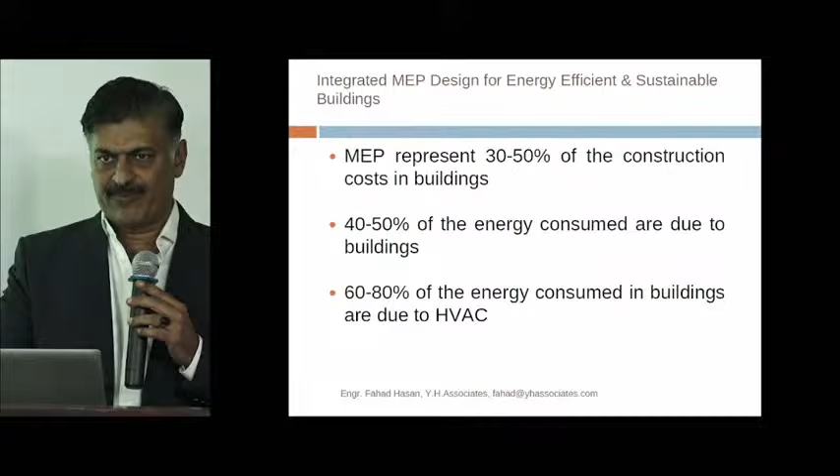If we look at residential buildings, the power loads are not much because cooking and hot water are by gas in Pakistan most of the time. But your air conditioner is basically the main eater of your electrical consumption. But if you are talking about an office, the power requirement for office appliances is definitely high. So we can say there the HVAC contribution is around 60%.

I went through a survey, and they said in Pakistan approximately 43.7% of the energy is being consumed by buildings. So on average, we can say 40% of the energy is consumed by buildings. An energy efficient and sustainable building is designed to minimize the environmental impact and energy consumption throughout its entire life cycle, from construction to daily operations.

When we talk about energy efficiency, its features include using less energy, employing methods to reduce energy consumption for tasks like heating, cooling, and lighting, which are mandatory for buildings. Otherwise, it will become like a dark cave. High performance designs incorporate advanced insulation, high performance windows, and optimal building orientation to minimize energy needs.

Energy efficiency utilizes energy efficient HVAC equipment, lights, and appliances to use less electricity for the same function without compromising usage. Renewable energy often integrates on-site renewable sources like solar power to lower dependency on fossil fuels. And the sustainable features include eco-friendly materials, prioritizing recycled, renewable, and sustainably sourced materials to reduce waste and demand for new resources.

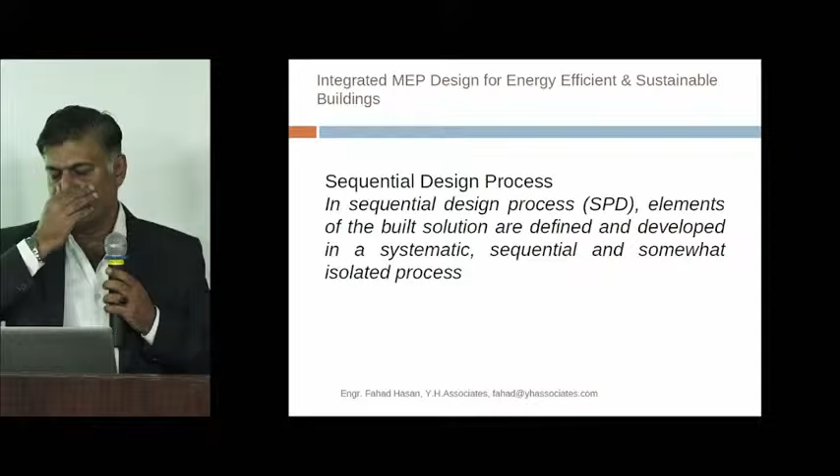What happens here in Pakistan and in most parts is that we follow a sequential design process. First the client will appoint an architect who will plan the area and make a schematic design, then they will go to the structural design engineer who will make the skeleton of the building, and then they come to the MEP engineers to develop what possibilities can be housed within those limits.

So the sequential design process is the process in which the elements of the building solution are defined and developed in a systematic and sequential manner, and somewhat isolated. It's an isolated process. Although for complex or large buildings, people have changed their strategy, and they cannot construct a high-rise building without involving the MEP engineers at an early stage, because you have to keep the provisions in the building. It's commercially not viable, and also not practical, to have a building without any MEP services provision inside that structure.

So these steps, I have made a summary from the ASHRAE TC committee. The architect develops the building program. The trade budgets are set to comply with the overall project budget. This is the important thing in Pakistan, because whenever a developer plans to construct a building, they contact the architect and say, okay, how much space, square feet, can I make on this building as per the laws, SBCA or cantonment or whatever the jurisdiction is.

So the architect conveys them a number, that you can construct 100,000 square feet or 200,000 square feet. They check at what cost they can sell it in the market, and they set their budgets. So that would be the land cost, the construction cost, the selling price in the market. So they have to keep it within that limit. Then the structural guys define the skeleton of the building, as I said, and then the MEP service engineers are given the proposed layouts and structure systems, and trade bidders are then directed to apply the MEP solutions within that defined budget.

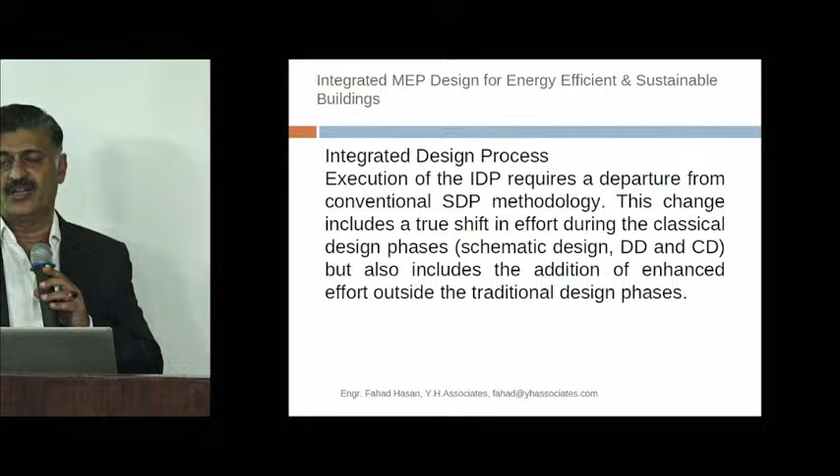So in the slides which we will discuss later, it is also very important that the commissioning guys, the commissioning methodology, has to be established at an early date, so that you know your goal post. If somebody designs a building with great architectural features, a very strong structure, very energy efficient MEP solutions, it's all on paper, all on the documents. But the people who are installing it must be aware of what the goal post is. Rather than: you write one thing, you draw one thing, they understand another thing, and the result will be in a third dimension. So the integrated design process is that each stakeholder must give some input from the start of the project, so the project will be a complete win-win situation.

Design of building services proceeds through phases, with the concept design stage first. No matter whether you are going with the sequential method or the integrated design method, the first stage is the concept design, then the schematic design, then the preliminary design, construction phase, and acceptance or commissioning phase, that is the handshake stage. In the concept design, the functional use of the building, owner and occupant requirements, architectural concepts, and budget limitations are typically determined. These requirements should be documented in a statement of design intent for the building systems, which is refined and updated as the design progresses.

If cold air distribution is to be considered for the project, it is best to advance the option at this stage, so the entire design team can develop it to realize its best fit. In office buildings, in commercial buildings, if it is intended to be used as an office, it is very common that the builders, or the project cost you must say, limit you on the building heights. If you construct a typical office floor with a slab to slab height of, say, 10 feet or 11 feet with some beams, definitely at a later stage it will be very difficult to introduce the ducts here.

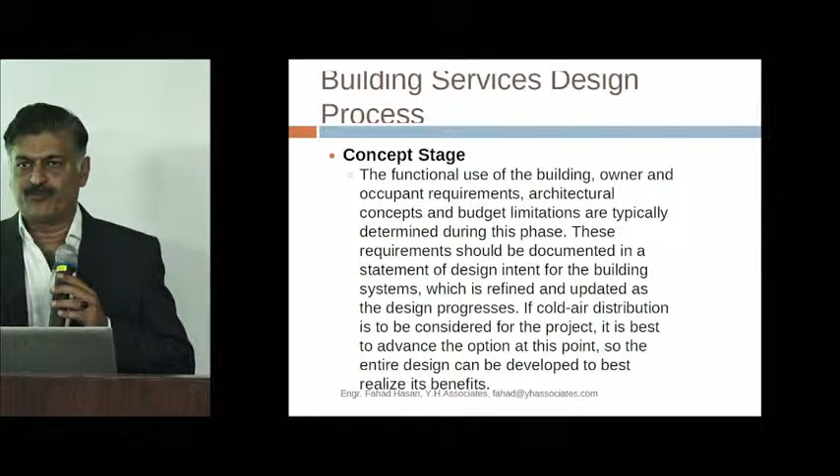So it is very important to define the goals at the start, what you want to construct. And even if you don't have the user at the start of the project, for example, it's a shell and core and the client has a plan to give this building to a tenant or for sale, and the user may come to that project at a later stage. So it has to be like the elephant's footprint, like a modular kind of thing. The building must have the capacity if somebody wants to add some defined system which is supposed to be in that area. Spaces would have to be there.

This is the example which I have just discussed, like the reduced space requirement for the ductworks may allow revisions to the structure design. If you have plans to install the duct in an area where the structure is already designed, definitely you have to do the redo. And if there's an integrated design approach, those redos will be avoided. Otherwise, it will cost you in terms of finance, in terms of time.

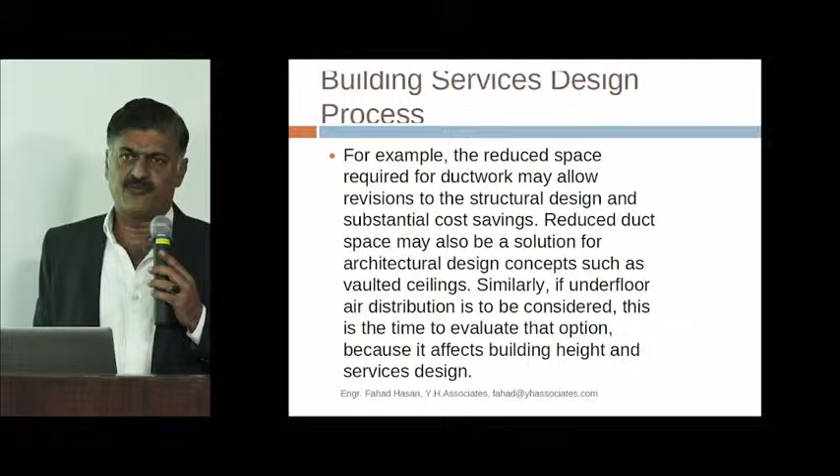Similarly, a very interesting way of doing the air conditioning for buildings is the underfloor air distribution. It is very famous in cold climates, where you are utilizing the floor deck for the air distribution; your ducts are in the floor. In Pakistan also, several data centers adopt this method. So if for any reason somebody wants to adopt that, it has to be defined at an early date. Otherwise, you end up with different levels of the floors.

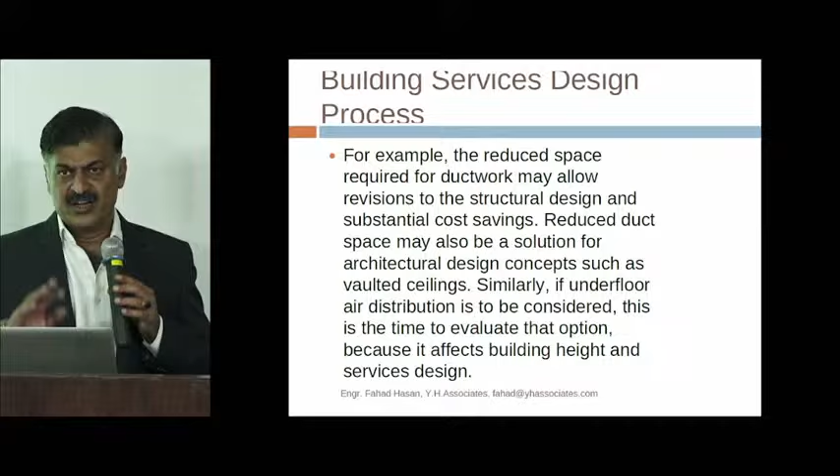The concept design phase begins when the owner identifies the need for the project and the program is developed. The two end products of the program phase for the service engineers are the detailed design intent statement describing the selected system, and second, the commissioning or implementation plan outlining the process by which the system will be designed, installed and commissioned. As I said earlier, it is very important at the initial stage that you define the goalpost for the building, what results you want to achieve from that system or the building.

The design team performs a feasibility study to evaluate system options and establish a budget. At the conclusion of the concept phase, the owner selects the desired system and the design team produces a design intent statement. Before going into the detailed design, one must define where you want to go in terms of the finances and the timelines for the project. At the concept stage, normally 15 to 20% plus minus is pretty acceptable for most of the clients. So normally, if we know the building usage and the user requirements, the MEP engineers develop options which are viable.

For example, there are 5 ways to do the air conditioning in that building, but 2 methods may not be applicable or suitable to that building. That has to be defined, that the shortlisted are the 3 ones. All 3 options will have some pros and cons, like some option may have a higher upfront cost but provide energy efficiency, or some may have short delivery periods and be easy to install.

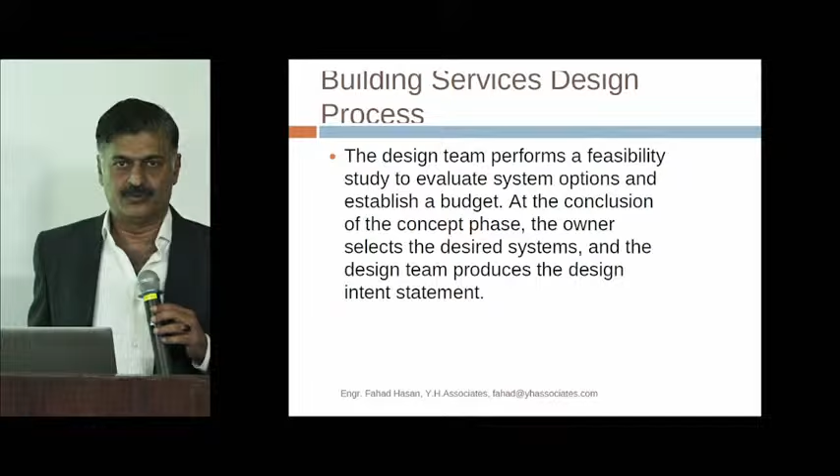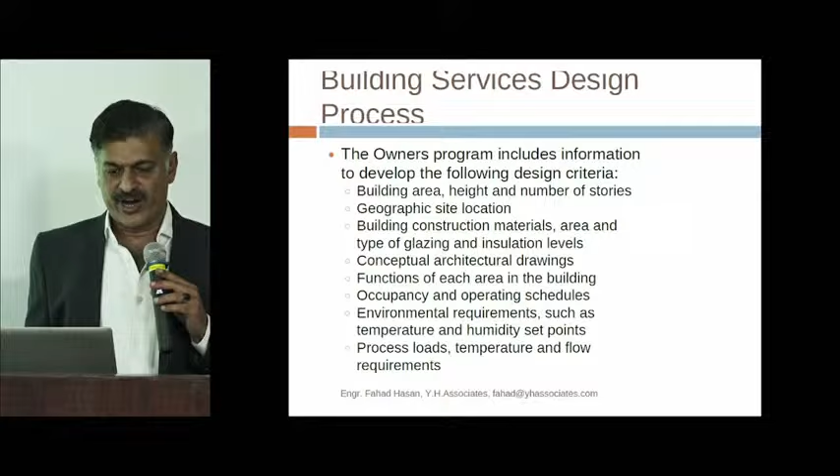The owner's program also includes the information to develop the design criteria, like the building area. Definitely at the start they discuss this with the architect: height, number of stories, geographic site location, building construction material, area and type of glazing and insulation levels, conceptual architecture drawings, function of each area in the building, occupancy and operating schedules, environmental requirements such as temperature and humidity set points, process loads, temperatures and flow requirements.

The power requirements of the project have to be defined at an early stage. Life safety analysis, which determines the type of the firefighting system. We are living in an era where in our neighborhood and at our home, there is a race of vertical buildings, vertical construction, and beside vertical construction, the horizontal buildings are of larger densities.

I remember when I graduated 25 years ago, if somebody had a project like 50,000 square feet or 100,000 square feet, and I'm not talking about my company, I'm talking generally about the market trend, it was considered a larger project in Pakistan. Today, sir, if you randomly check with the architects, someone is designing 50,000, 500,000 square feet area, 200,000 square feet area.

If a normal building at Jinnah Avenue is constructing 14 stories, it ends up with 600,000 square feet area. So the population, the densities of the buildings, the sizes of the buildings are such that earlier people didn't consider firefighting or the life fire safety analysis, but today it becomes mandatory, because consider a building which is housing around 2,000 or 3,000 people, God forbid, something goes wrong.

So it is not about what system you have installed there or what the buying power of that resident is, whether there is a child or anybody inside that building. You have to define how they will evacuate that building or how they will stay in that building safely for a certain duration till somebody from outside evacuates them. So life safety analysis is very, very important.

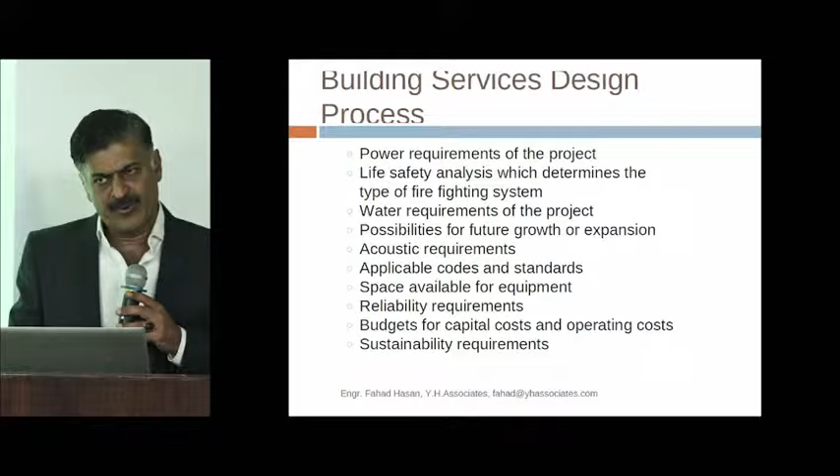Systems like the ducting and the other stuff you install may last for 50 years if installed well and handled properly. But beside this, the hospital equipment, the radiology equipment, is very expensive equipment, and its life is 5 years or maximum 6 years. And even if the equipment life is more, evolution happens everywhere. New research and new processes come, so they may require some changes in that area. So the possibilities of future growth or expansion.

The classic example: the computer arrived in Pakistan commercially in the early 90s and became a necessity in the late 90s. Earlier, the design offices had drawing boards in the drawing section, with 3 or 4 draftsmen and fairly large drawing boards. Where there used to be 4 draftsmen, now there are more than 10 CAD operators. This happened in my office too, by the way. So with the passage of time the density and requirements may change. No one can keep provision for 100% growth or 100% modification, but decent, known expansions must be kept in the provision.

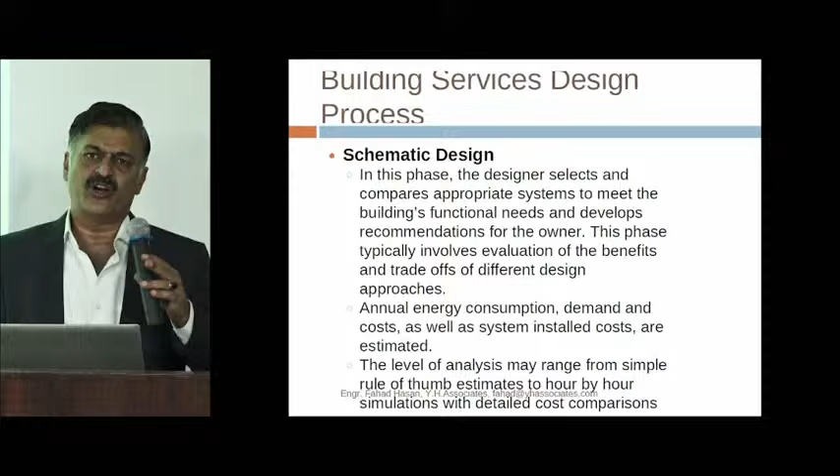Most of my seniors must know that when we talk about building construction cost, for example, if it is costing you $10 per square foot, then looking at the life cycle cost, the rest of the $90 you have to spend over the next 20 years on consumption and maintenance of that building. So at the early stage, if you are considering life cycle analysis for the building, you must be aware of the energy cost today and what it was 5 years ago, so you can predict the energy cost after 5 years.

So if you compare the life cycle cost, you may end up with the conclusion that rather than spending $10 a square foot, you may spend $12 a square foot, but the saving would be that rather than spending $90 in the next 20 years, you may spend $70. So the system may have a higher first cost but be more suitable for that building. But if it is a builder's project which they have to sell and they are not into operations, their intention would be different. They will not spend $12; they will not even spend $11 for that.

So at the schematic stage, you have to make the cost comparison, and it is always better to compare the cost on a life cycle cost basis. After the schematic design, this is the preliminary design phase. During this phase, building service engineers coordinate the MEP system with architects and structure systems to resolve potential conflicts, to have a fight with them to get the spaces above the false ceiling or the openings in the slabs.

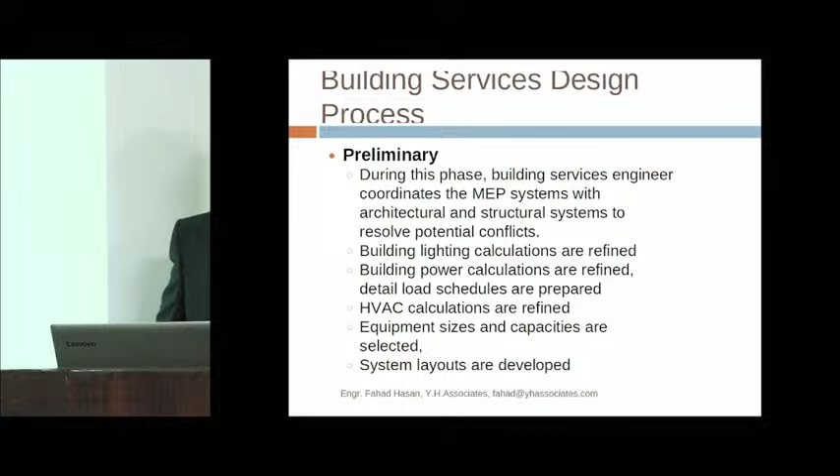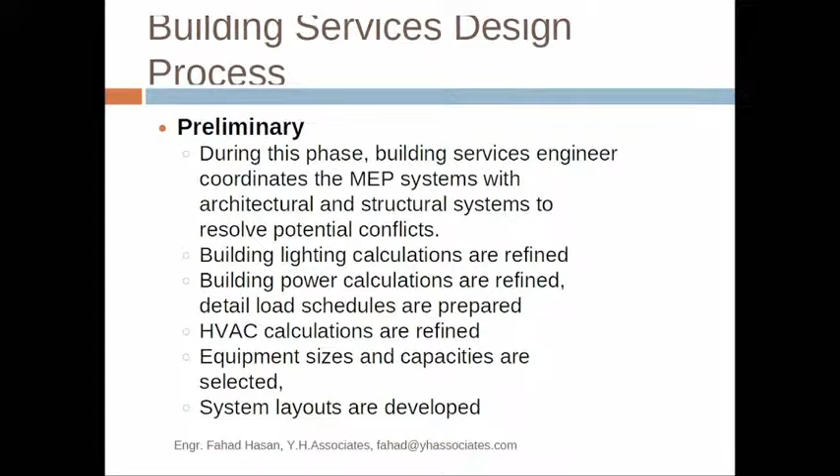System layouts are developed, and if it's an integrated design process for the project, you definitely coordinate with the structure engineer at an early date on where your equipment will be, what would be the potential operating weights in that area, what would be the shaft requirements, opening and exhaust requirements for that area, and things will be in a streamlined way.

Then the final design and preparation of the construction documents. In this stage, the primary layouts and the equipment selections are fully developed, and the final drawings and specifications are completed. Some projects involve preparing alternative designs with the bids for all options. In such cases, the primary option generally receives the most effort during the design phase. As I said earlier, there are several options to meet the project requirements. Maybe somebody wants to have 2 options for their building.

There was an example here: earlier we didn't have the gas connection for the residential buildings, so at that time, for the buildings which were under construction, the client normally kept a provision for the LPG cylinder banks, and there are companies who provide you the LPG gas along with the complete setup, and they came and replaced those tanks, and they are charging for the LPG gas.

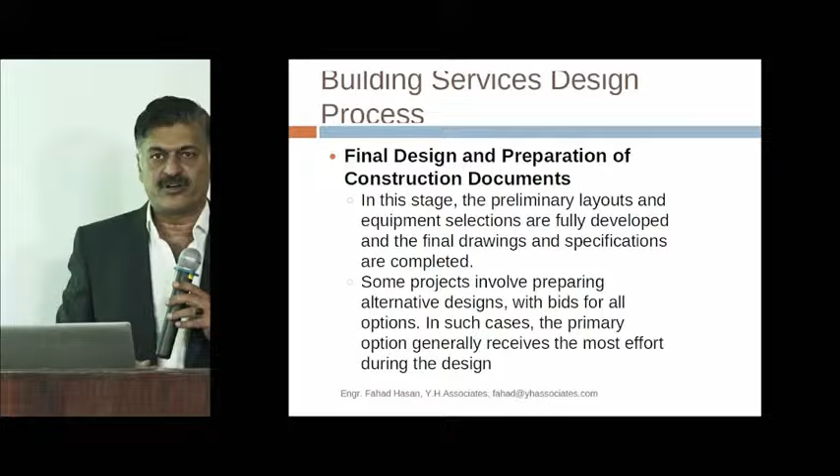So sometimes at the design stage you are not sure where you will land at the time of construction or after construction. So if you keep provisions, you better make 2 designs or alternative designs and go for the best one. Or if there is a cost impact or time impact of designing two systems in parallel, which is definitely two projects in one project, usually you keep the elephant's footprint, the larger provision, in the design, so that it is suitable for both. I am talking about the space requirement, the water requirement in the underground tank, and the height requirements.

Construction phase: the design engineer's responsibilities during this phase typically include reviewing shop drawings, observing construction, and conducting or witnessing the system performance tests. Contractors may require guidance to ensure that they are following the project specifications rather than their own standard methods. Having said this, in the integrated design approach, you will develop the commissioning plan at an early date, and you may involve contractors to a certain extent, like opening of the provisions or the sleeves or the embedments in the building at an early date, but even then the contractor's main responsibility comes at the later stage.

But if you involve their expertise at an early date, they are aware of the commissioning program or the goal post. So the project's redo will be less at the later stage, and commissioning time will be saved.

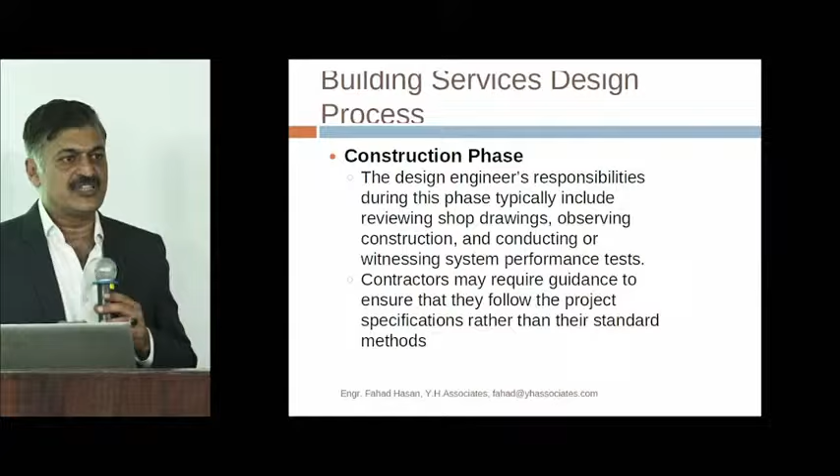Acceptance, or the commissioning phase, or the handshake phase. The term commissioning is often used to refer to the startup and functional performance testing of MEP systems. Experience has shown that a comprehensive commissioning procedure is essential to the success of a project. No matter how smartly you have designed the building, what matters is the user. Say I have installed an air conditioning system here which is very energy efficient and reduces the power consumption by 50%.

But if it is not maintaining the temperature of 26 degrees and is maintaining 29 degrees centigrade, definitely the user will say that is not acceptable. He will be more comfortable with a mini split unit installed on the wall, looking inside the area, rather than the ducts and air devices which you install above the ceiling. So it is always important that the commissioning phase is defined at an early stage, and the expectations of the project have to be defined at the early stage.

These are the steps for the successful completion of a complex building project. Basically, I try to summarize it in a way that whether it's a new hospital, renovation of an existing laboratory, or expansion of a manufacturing facility, a complex building has to be designed to perform at a high level. If it is not commissioned properly, the high performing facility being built could be severely

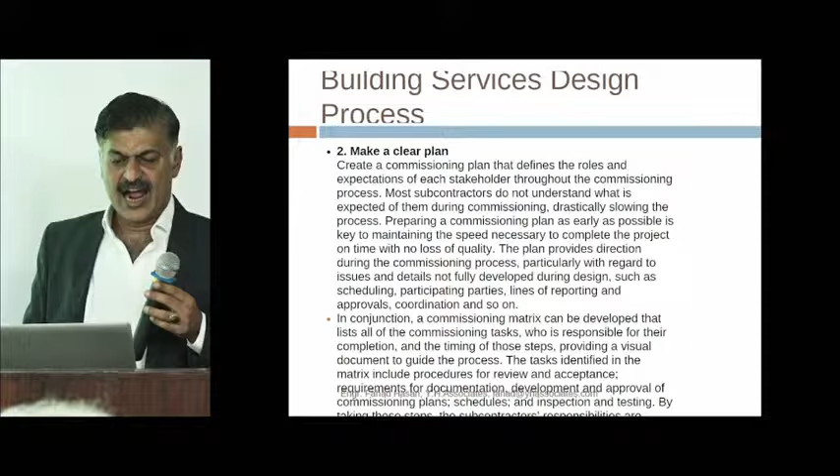The process should start as early as possible and be a collaborative effort among all key stakeholders in the building's success: owners, architects, engineers, construction managers, subcontractors, and the building management guys. Make a clear plan: create a commissioning plan that defines the role and expectations of each stakeholder throughout the commissioning process. Most of the time subcontractors do not understand what you are expecting from that system. They just do the commissioning according to whatever written statement you have given them, and when you check that system, you may not be on the same page about what the design guideline says. So if you involve the commissioning guys at an early stage, everyone will be on the same page and the commissioning method will be more streamlined.

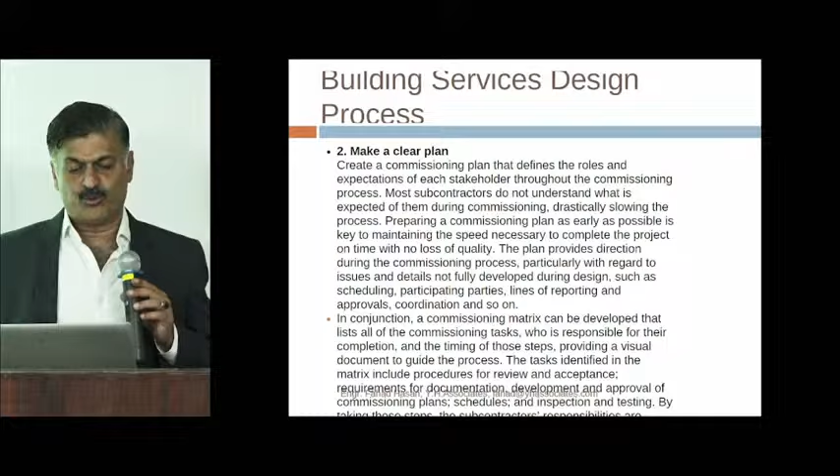In conjunction, a commissioning matrix can be developed that lists all the commissioning tasks, who is responsible for them and the timing for those steps, providing a visual document to guide the process. The tasks identified in the matrix include procedures for review and acceptance, requirements of the documents to be developed, approval of the commissioning plans, schedules, and the inspection and testing methods to be defined.

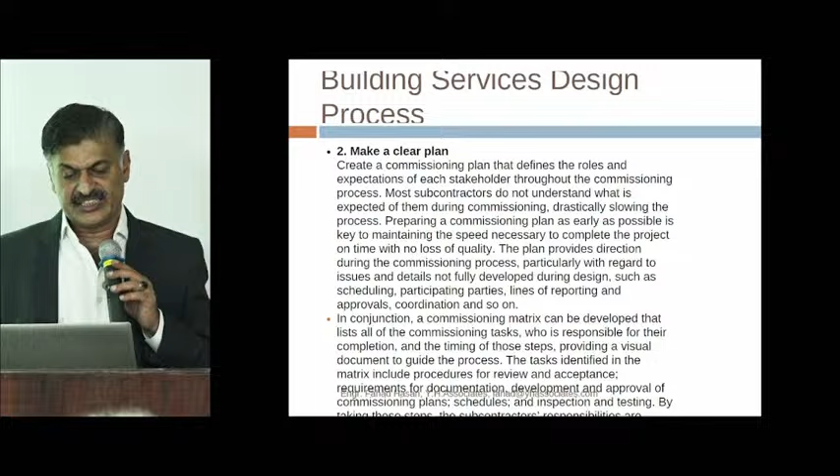Put it into the schedule. You may end up with dozens of documents and dozens of methods, but you must define them in the timelines. Whatever efforts you put on that project have to be within the project timelines. No matter how good a design you have made, what Einstein efforts you have put on that project, the client basically requires their project to be completed within the defined timelines. Commissioning activities should be built right into the master construction schedule by incorporating the various commissioning tasks as line items in the master schedule. They are more likely to be completed in the proper sequence for a successful result. Adding commissioning to the master schedule also reinforces each stakeholder's responsibility over time and re-emphasizes the collaborative nature of the process by putting commissioning front and center for everyone to see.

The fourth one is documenting each commissioning act, creating a log of performance standards, inspection, testing, and if necessary, corrective actions for systems and equipment. Verify that all relevant design and construction work meets the objectives established during the pre-design or design phase. Detailed binders housing these commissioning logs, known as turnover packages, can then be created and maintained to serve as a historical record of the project. When construction activities are at site, there are several types of tests you do at site based on the systems and the components. For example, it is now very common that 99% of the time you are installing non-metallic pipe, UPVC pipe, for the water supply system.

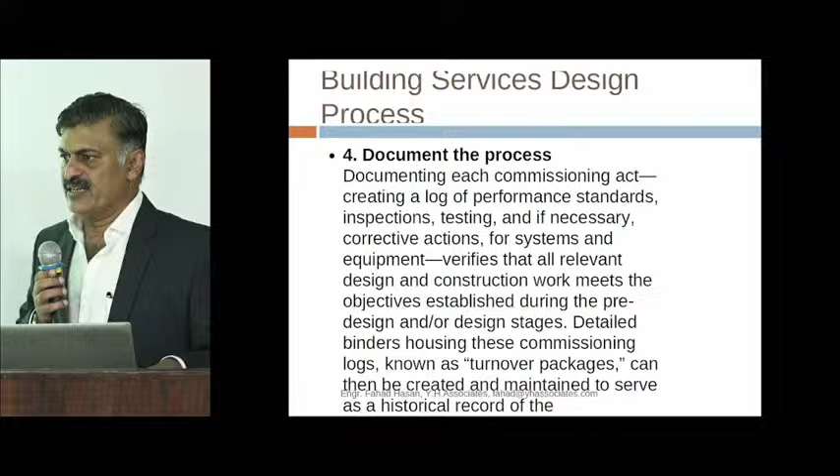Sir, I saw this at one of the projects: for PPR pipes, if you go with Dadex or AGM or any brand, there is a method of testing that pipe. The BS EN does not recommend testing plastic pipes by holding the water for 24 hours. I will share the details with you after this.

They said you have to pressurize the pipe for 5 hours to a certain pressure, then increase the pressure for the next 2 hours, gradually increasing it, and then release the pressure. This is how they recommend testing plastic PPR pipes, because they are polymer pipes. So if you put extra pressure on them, their strength may definitely be affected.

Sorry? Definitely it has to be done by the recommended practice. I am not with the group who say to put it under pressure for 24 hours, but this normally happens in projects everywhere I have seen. My point is not how to test the pipe. Definitely I will go with the... sorry.

Excuse me, please. Okay. Can you hear me, sir?

Okay. What I was saying, sir, whatever component, pipe, material you are using for your system, first of all, you have to follow the standard method of installation. You have to check what is suitable for that area when you are selecting the material, and you have to test the pipe according to a certain standard, as you said.

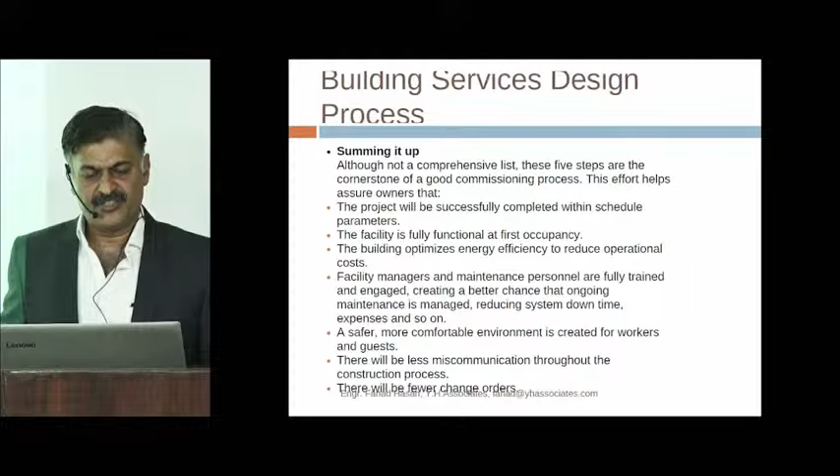And then the building optimizes energy efficiency to reduce the operational cost. Facility managers and maintenance personnel are fully trained and engaged, creating a better chance that ongoing maintenance is managed, reducing system downtime, expenses, and so on.

Like I said, at the time of the commissioning, you may end up with 19 or 20 MEP services in the building, which will start from the air conditioning, CCTV, low current system, and the water system, and you name the system, it will be there. So you may end up with 50 or 60 brands of equipment of different types installed in your building.

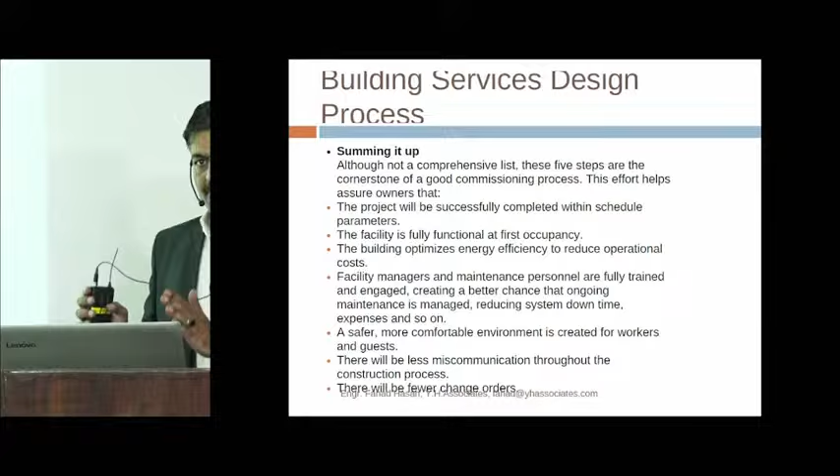Every manufacturer surely gives you some warranty for a year or 18 months. So with that guarantee or warranty, they give dos and don'ts. So that has to be clearly defined in one operation manual, and the team who is responsible to operate all those systems must be aware that this is the operational procedure, this is the SOP to operate the air handling unit, the generator, the pumps, and so on.

And besides operations, just like we do with our vehicle, you have to check the oil and replacements, and the maintenance has to be made. Like the air handling units, you have to check the filters periodically. And like the motors, you all know no motor will burn at once. It starts misbehaving: it will start drawing higher ampere, the noise of the motor will change much earlier than it finally goes off.

So if there is systematic periodic maintenance, you can predict the maintenance schedule, you can adjust things much earlier at your convenience. A safer, more comfortable environment is created for the workers and the guests. There will be less miscommunication throughout the construction process. There will be fewer change orders.

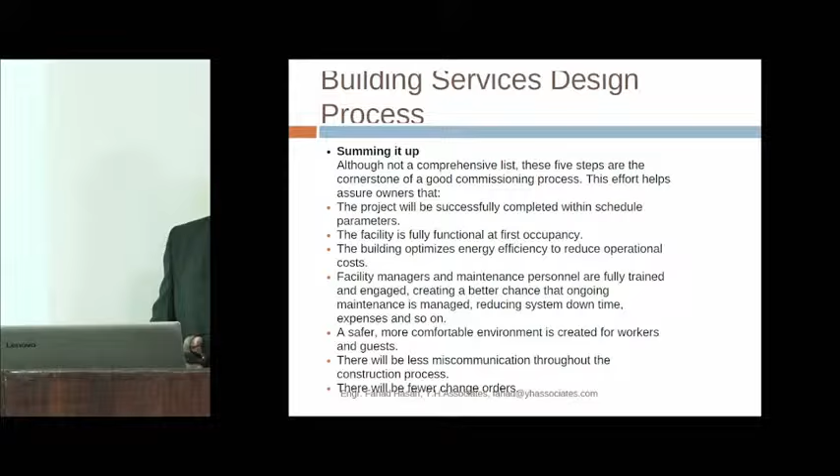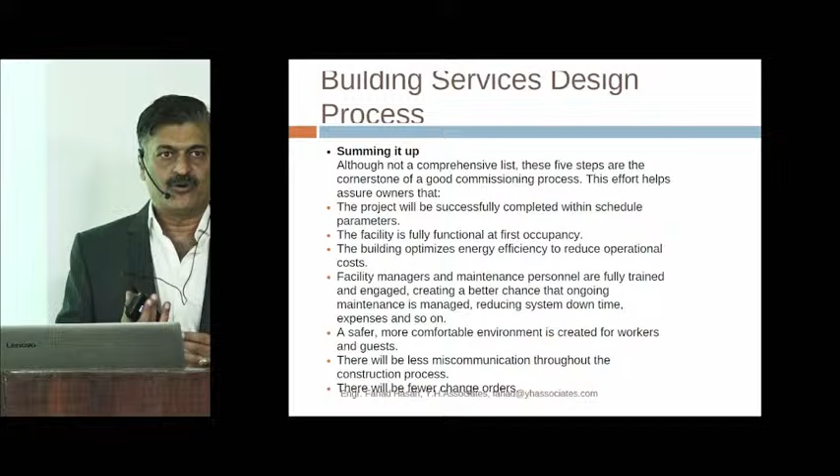So this is what I have developed, and the main idea I was trying to discuss here is, we are all aware of energy efficiency in Europe, in America, in the developed economies. It's like a fashion kind of thing, or their commitment towards their nation, but it is mandatory for us because we don't have those resources. Buying power is limited. So if you are designing something with energy efficient equipment, or your system is consuming less energy, you definitely end up with a better system.

But the key idea is, if you are planning to, if you are... So you are saying something?

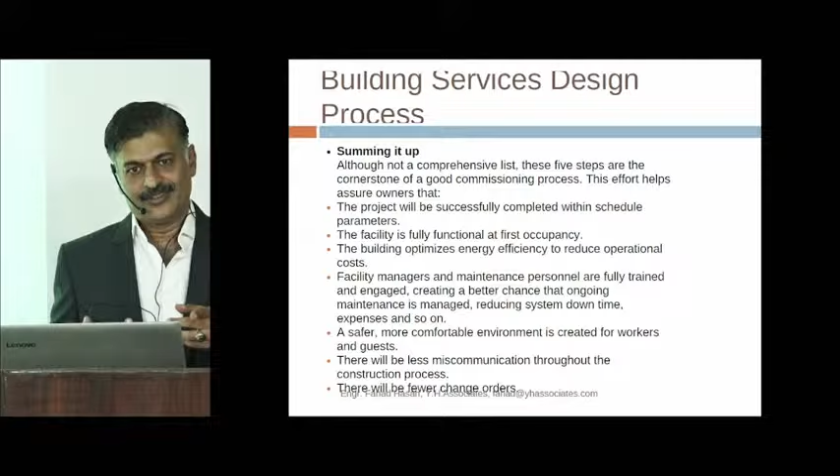The central idea is that if you are planning to have building MEP systems with low energy consumption, energy efficiency of course, and sustainability, it's not about you as a designer or an engineer or the contractor. It has to be a project defined goal, and the client, the buying pocket, must be aware that this is the goal he wants to achieve.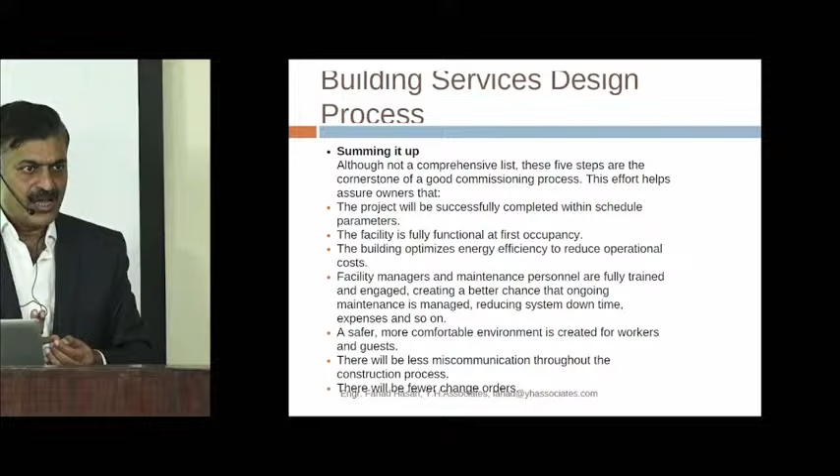If you ask any client, any developer constructing a building, do you want energy efficiency or not? Everyone wants energy efficiency, but if you want energy efficiency, then you have to select the path which leads you towards the energy efficient solution. It may require more timeline, more finances, or some more expensive equipment, but it has to be defined at an early date. This is the first thing.

The second thing I try to convey here is that everyone has a role. The architect normally starts; the builder definitely will not publish in the newspaper and bring a dozen people who will install the equipment, supply the equipment, or build the structure. Definitely he will contact the architect. But once the project is started, you have to involve the professionals at an early date, rather than constructing a building and then thinking, I want to finish the building and put the systems in, because then you have fewer choices in your hand.

So if the decision of selecting equipment or defining the MEP systems of the building happens at an early date, you have to engage the people at an early date, and the commissioning process has to be defined at an early date. That way, you will save time, you will save finances, and things will perform how they were supposed to.

So sir, this is all from my part, and I hope you understand. Let me know if you want me to repeat something.

Thank you very much. And if somebody wants to add something here which I may have missed, he may discuss. If somebody has some question, I am here. So I am open, sir.

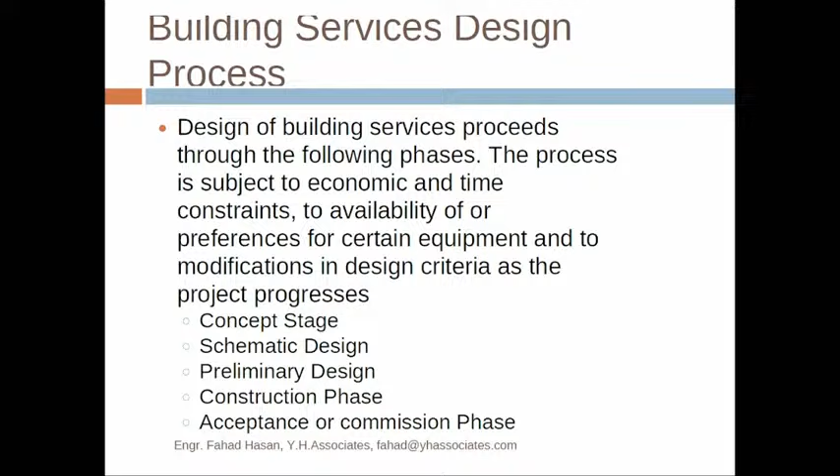Okay. As I mentioned in this slide, these are the stages we are all aware of: the concept stage, the schematic stage, the preliminary stage, and the construction and commissioning phase. What integrated building design requires at the initial stage is the involvement of all stakeholders and professionals on board. If you are developing a multi-story apartment building, a very simple building, on the lower floors you may have 2, 3, 4 parking levels, then a ground floor with the lobby and a few shops, and then the typical apartments upstairs.

So there are two ways of doing the thing. Now, you appoint an architect, he will mark the layout: the 3-bedroom floor, the 2-bedroom floor, this many apartments on one floor, this is the corridor. Then you appoint the structural engineer who will do the structural design and make the beams and the columns. They may coordinate with the architect, adjust things, and finalize. Then you start thinking that I need the light there and I need the plumbing engineer there.

But at the start date, if you keep the MEP engineers on board with you, they will specifically define for you that this would be the shaft requirement there, because otherwise it would be like the elephant's footprint, or it may become shorter. So the MEP guy will give you their input that this is the specific size required at this place, or